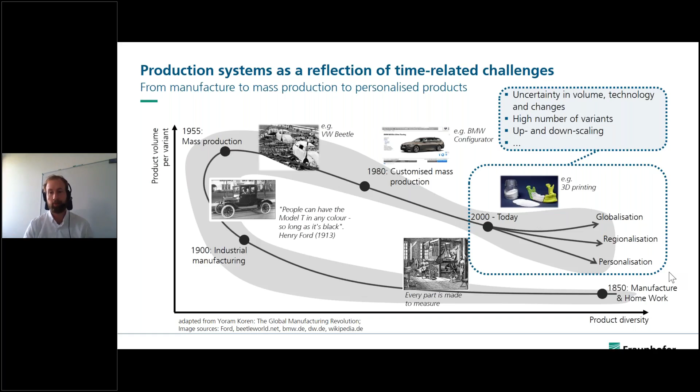So today, your production system has to adjust to these challenges over a product life cycle, and maybe it's not anymore that you ramp up a production system for the start of a product, but much more that you ramp up a production system in your factory and try to include further products over its life cycle. So if you think about taking these challenges into your production system, we're talking, in our perspective and at our institute, about matrix production systems.

Matrix production systems are mostly flexibly linked process modules. What are process modules? I will talk about it in the next slides. But the concept of a matrix production system is trying to adapt to new conditions from the outside and to mirror and match them to your factory system. A matrix production system tries to adapt to differences in quantities, variants, technologies, and processes over a production system's life cycle. It tries to be the answer: to be more flexible in your system, to be productive even with a high number of variants, and to enable upscaling and downscaling in really incremental time steps.

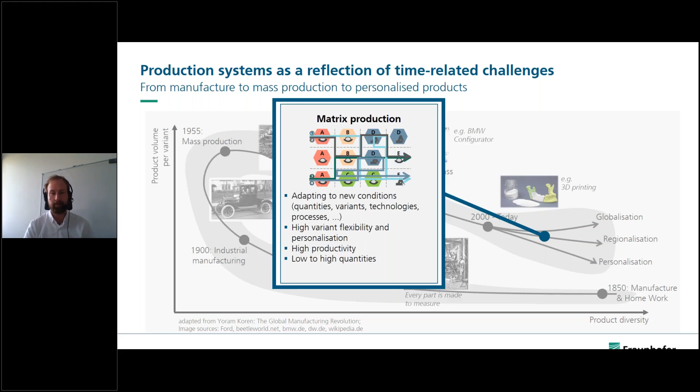Talking about matrix production systems, in our perspective, a matrix production system consists of flexibly linked process modules. A process module can be quite different in its configuration. For example, a process module can be, like at the top left side, a single workstation, where manual processes with differences in cycle times can be operated.

If you think about differences in cycle times in the context of line production, it's not easy to be efficient implementing all the different cycle times in your production line, because if there's a difference in cycle times, the left worker has to wait on the right worker, and waiting time is wasting time. It's not really lean. So the challenge is to be more flexible, and you can get it by making it a little bit more independent of the other stations.

If there are still tasks and processes which are mainly repetitive with no real differences in cycle time, it's still interesting to make a process module like you see in the middle top, which is still like a line production, but you don't put every process in it, just the processes which are near together and have no difference in cycle time. So you can say there's a subsystem, a line production, within your matrix production. And there might even be automatic stations for repetitive tasks and processes.

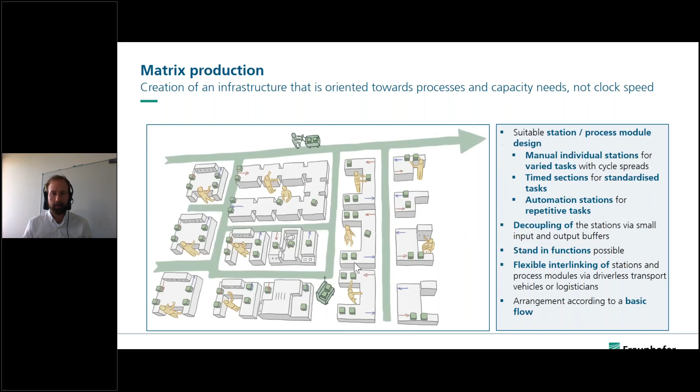As mentioned, there are no fixed process chains for your orders anymore in a production system. It is more an order-specific decision making in your production system, and it's not that you make the decision far before the production start of your order. It's just during the production that the order decides which station or process module will be the next one.

This depends on which processes and operations are required by the order, but also, from a second perspective, on where the lowest waiting queue might be for your product across all stations that offer the needed processes and tasks. Think about it not as a fixed production system, but as an infrastructure which offers different processes and technologies to your orders.

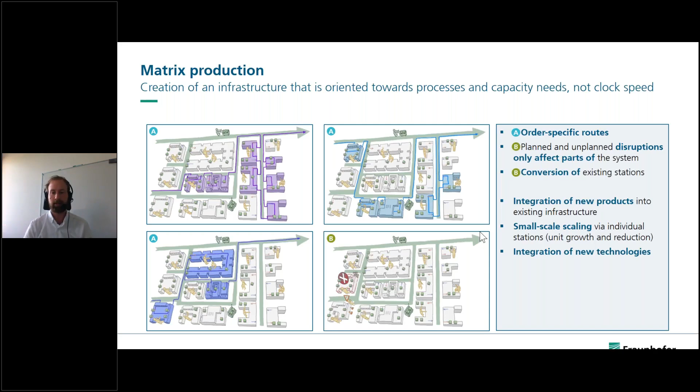On the contrary, if you see that there are technologies no longer required for your product, you can just take them out of your production system. And you don't have to stop the whole system to make incremental changes. You just have to stop one or two stations affected by the changes, while the whole system around these stations keeps operating.

To put this into an example, let's talk about car manufacturing. Today we see a rise in electric vehicles, but you don't know how far this will go, or how the political system will decide, for example, whether diesel vehicles will no longer be allowed after 2035, or whether there will be more hybrid customer demand. Some customers still go for diesel vehicles, but how many people will go for electric vehicles? This is not easy to say for the future.

So you have to design your production system much more flexibly, and there might be points over the production life cycle where you have to make changes. In this case, we talk about flexibility corridors and the change between flexibility corridors over time.

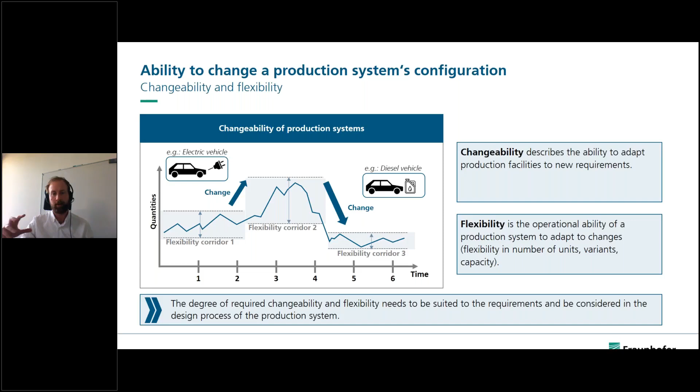So instead of thinking about just one product life cycle and building a production system for only one product and its variants, it might be interesting to think about which products you want to manufacture in your company, in your factory. Isn't it more interesting to think about an infrastructure a product might use, and change that infrastructure according to new and declining products? It's more like a life cycle of a production system that continually adapts to changes in customer product demand.

So going to this picture, it's not that you ramp up a production system for your new electric vehicles and ramp down the production system for your diesel vehicles. It's interesting to ask: aren't there a lot of processes common to both cars? Of course, there are differences between the electric motor and the diesel engine. These are completely different

parts, and there might be completely different stations to build in these parts, but a car is still a car. The interior and exterior processes, for example putting a seat or a wheel into your car, might still be the same. Of course, in detail, the parts and seats may be different, but the processes to put them in might still be the same, and the knowledge the worker needs is still the same as in past years.

So think about a system where today you have many more stations putting in the diesel engine, some stations to build in the interior and exterior, and a few stations to put in the electric motor. It might be interesting to think of the production system as an infrastructure which just changes over time, not totally ramping down and not totally ramping up.

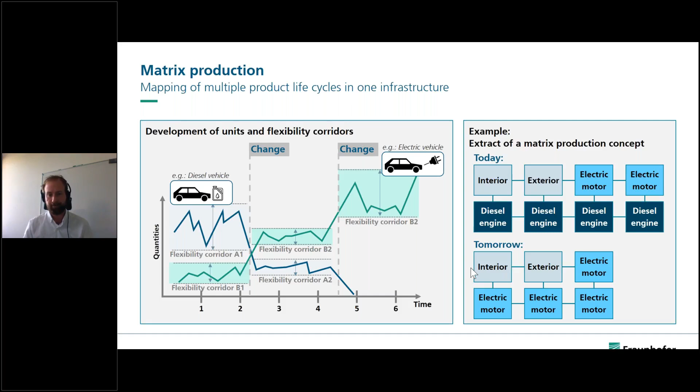But as you can see, you have made some changes in your system, but some aspects of your system are still quite the same, like this example, the interior and the exterior stations and processes. So, a short summary of the matrix production system. We're mainly talking about flexibly linked process modules. A process module can still be a subsystem displayed as a line system if there are only small differences in the cycle time, if they're easy to put in one fixed chain.

But if you're talking about variants and processes which have really high differences in the cycle time, if there are differences in the demand, it's interesting to think of decoupling these stations and being a little bit more flexible. Of course, it's not like you only get the benefits and there are no disadvantages. There might be an increase in the work in process, but if you can increase your flexibility and be much more productive, maybe you take a little more material waste in your material demand and your work in process, but you gain much more in the productivity of your workers and your resources.

So the advantages of a matrix production system are that you can implement a high number of variants in your production system. It's much easier to scale up and down depending on the requirement and the customer demand. And thinking about the technologies and the automation of processes, you have a much more planned utilization. You use your resources much more effectively and it's much easier to automate processes by combining the demand of different processes at one single automation station.

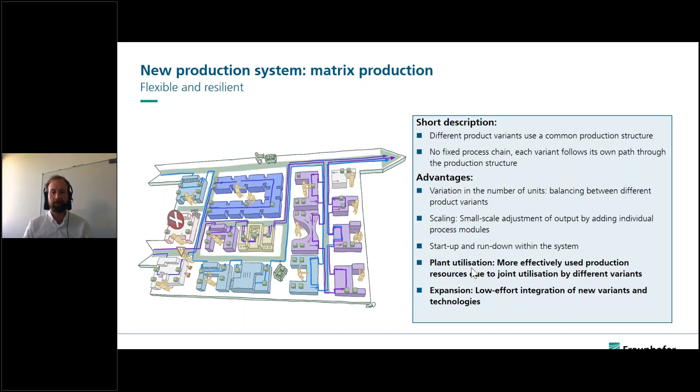So this is not only a theoretical model. We have projects trying to implement matrix production systems in different factories. One project we had together with Siemens in Karlsruhe. They built industrial PCs, and they were still producing a lot of products, but they had the feeling that they were not so productive anymore. So we did a project with them, looking into their manufacturing and assembly processes, where we have to decouple some stations and processes, and where it is still beneficial to use the lean line design,

the line production system. So we designed some parts where they still have the lean line, and some parts where they had decoupled stations with a high automation level, and linked all of these stations by an AGV system. So today they are even more productive and even more flexible. In this case, they mostly have only advantages. They have a little increase in work in progress, but in total they are really happy with their new solution. Overall, there are more advantages than disadvantages to this kind of production system.

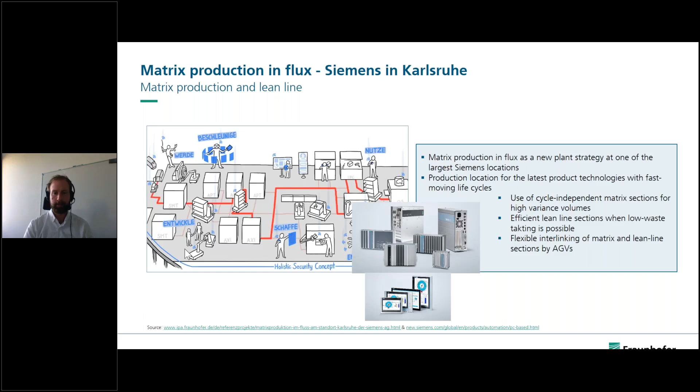And if you only have a high variance but low volumes, it's still interesting to think about shop floor manufacturing or single workstations. But if you have to combine both, really high variance, a really high total volume, but a low volume in each variant, it's interesting to think about matrix production system, thinking about decoupling stations, and redesigning your production system. There's still another name here, the fluid production system.

It's still mostly, in our perspective, a research topic. It's, for example, in Arena 2036 here in Stuttgart. It's a research campus. So it's more like an outlook that there are even more flexible systems in the future, which can be much more adaptable in a short perspective, changing a production system each day. So this is more like a teaser for the future.